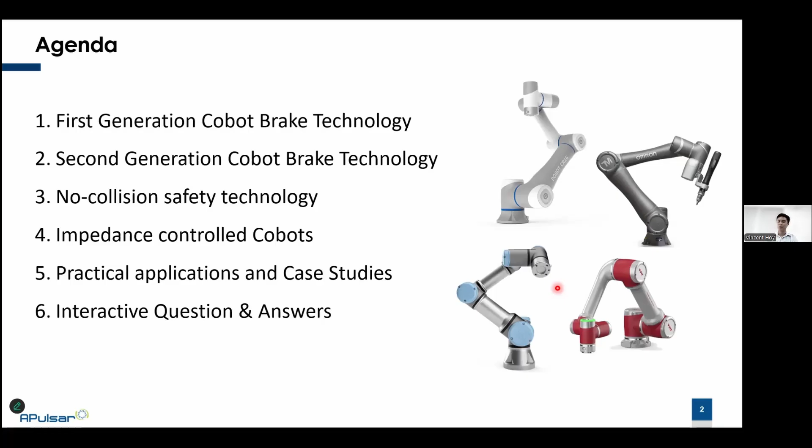And we're going to discuss the practical applications and the case studies and see in what circumstances the different generations of collaborative robots would be more suitable. And we will end the entire presentation with a Q&A session. So with that out of the way, I would like to first start with a general technological disclaimer.

Now, I'm going to first show you 4 photos over here. These are photos of the gearbox within industrial robots, and these are really established brands. You can see here there is KUKA, there is ABB, Fanuc, and Yaskawa. And you might be wondering why I bring up these photos. It's because I want you to notice how different the entire gearbox setup is within each of these well-known industrial robot brands.

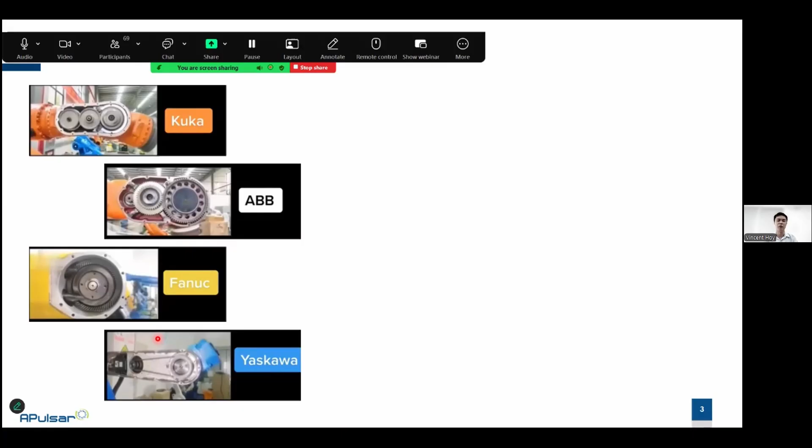Because throughout this presentation, I want everyone to keep in mind that different manufacturers have different internal mechanisms and designs to achieve the performance of the robots. And the same is true for collaborative robots. Unfortunately, we don't have really nice pictures of the gearbox of all the different collaborative robots, so I'm not able to show it in detail, but keep this in mind.

And the second thing is that the information that I'm about to share is actually very general, and it's a broad classification of the technologies in collaborative robots. So you may compare multiple brands and say that they have the same performance, the same repeatability, the same movement and joint angle, but there is a good chance that in the robot design itself, the mechanisms are totally different, right?

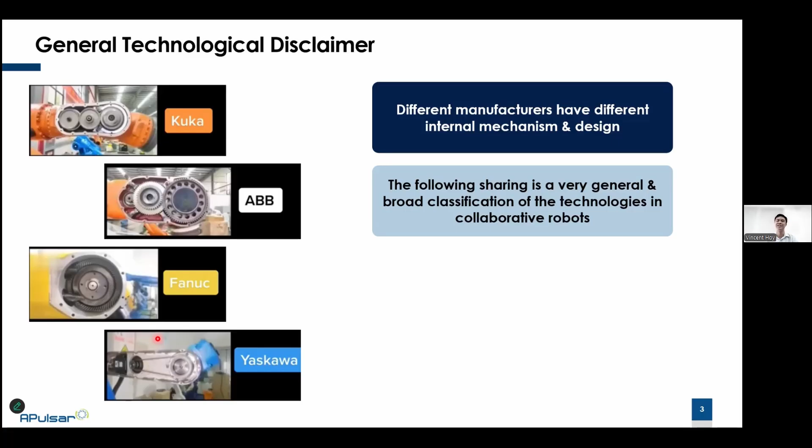So in this presentation, I will just try to group them in a very general manner so that we can use this information when we are designing our automation projects in the future. In fact, for most of us, if we look at the robots from the outside, we can't really see the difference, you know.

I'll give you an analogy. For those of you who know about Formula One, the racing car, right? You may look at the 20 cars on the track and they all look the same, you know, 4 wheels, a front wing, driver sitting in the center. But when you are familiar with the industry or with the technologies itself, you will begin to notice subtle differences between the cars. And the same thing is true with all the collaborative robots.

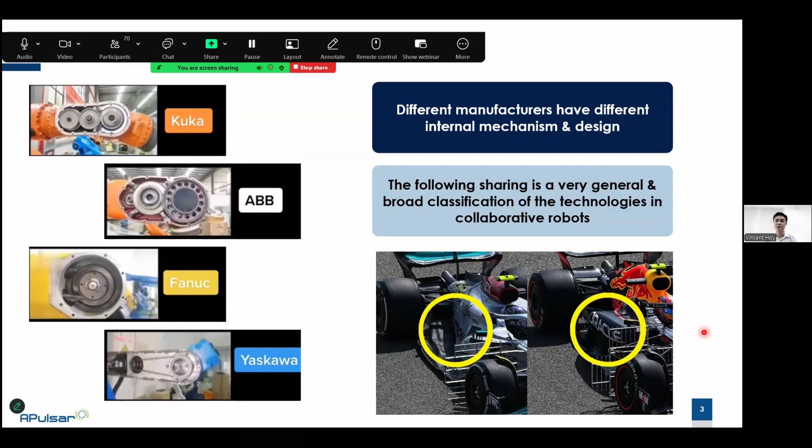Each of them may look the same, but there are actually subtle differences which differentiate the brands from each other. So with this disclaimer done, we shall now move on to a very quick refresher of the main differences, the advantages and disadvantages of collaborative robots in general.

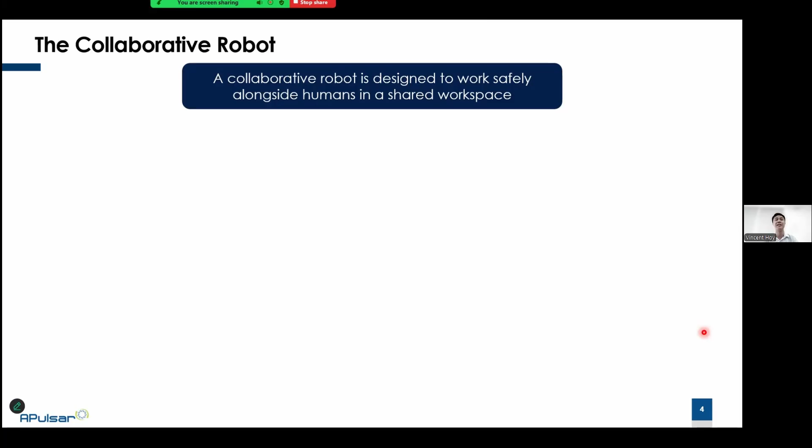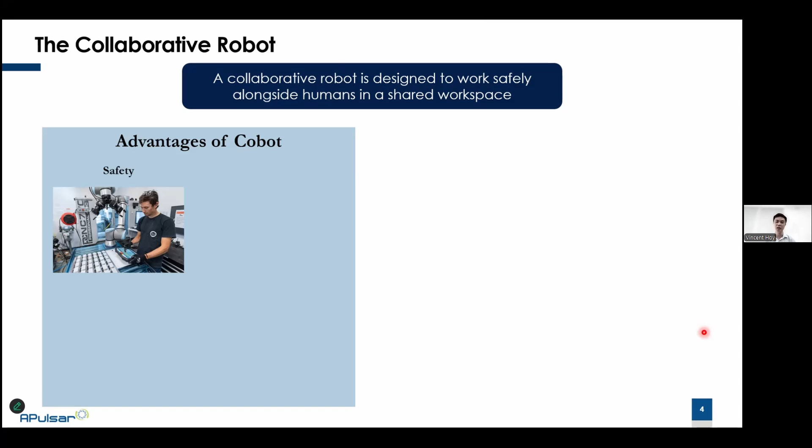So a collaborative robot is designed to work safely alongside humans in a shared workspace or a shared environment. That was the key differentiator that differentiates it from industrial robots. So generally, there are four advantages of collaborative robots. First is in terms of safety. Humans and the robot can work together without requiring safety fencing to isolate the machine from the operators.

Second, in terms of programming, collaborative robots tend to take a more user-friendly approach, a more graphical programming approach, a simpler programming interface as compared to industrial robots. Number three, collaborative robots are much easier to set up due to their light weight. The robot is lightweight, and the robot's controller is also significantly smaller.

So in the past, when we wanted to install an industrial robot, one person could not do it because you have to move these big robot controller cabinets around. But for collaborative robots, there is an opportunity where one person alone could set up the entire robot, from the controller to setting up the robot on the robot base and even the application itself.

And because of the lightweight design of the cobots, it makes them more flexible to mount. The same model of cobot can be table mounted, inverted mounted, or wall mounted. Whereas for industrial robots, if you want to do inverted mounting, you have to select a model that is designed for inverted mounting. So this kind of flexibility is one of the key advantages of collaborative robots.

Now, in terms of disadvantages, there are also four. First is in terms of the payload. Because cobots really prioritize safety to be able to work side by side with humans, they sacrifice a number of things, the speed and the payload. So if you notice, most cobots right now rarely go above 30 kilogram payload, whereas industrial robots can go up to 1 ton or even 2 tons of payload.

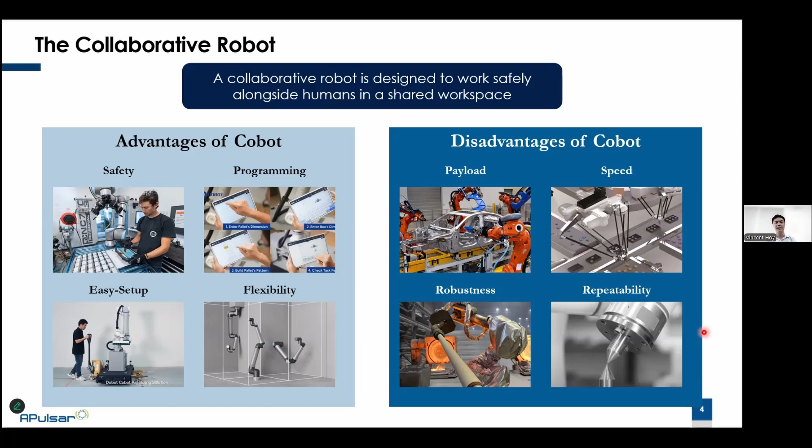So now let's talk about the first generation of cobots and what is interesting about it. This technology applies to the first collaborative robots launched in the market from the early 2010s, and it goes on all the way until the late 2010s or the early 2020s, right?

So what is interesting is that when they built and designed the first generation of collaborative robots, the main goal really was just to work alongside humans. They sacrificed the speed, the payload, and the accuracy so that they could work alongside humans, because that is the key product differentiator between cobots and industrial robots, right?

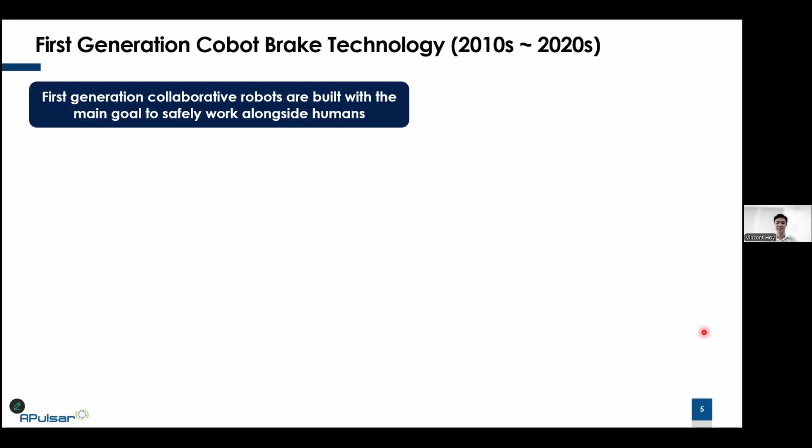So therefore, some of the key features that they emphasized are, number one, you can use this robot without safety fencing. And even without safety fencing, you are still compliant with the safety standards. Number three, they programmed the robot to be very user-friendly. It has a very user-friendly interface for operators and technicians to program and adjust the robots. And the last selling point is what we call hand drag point teaching.

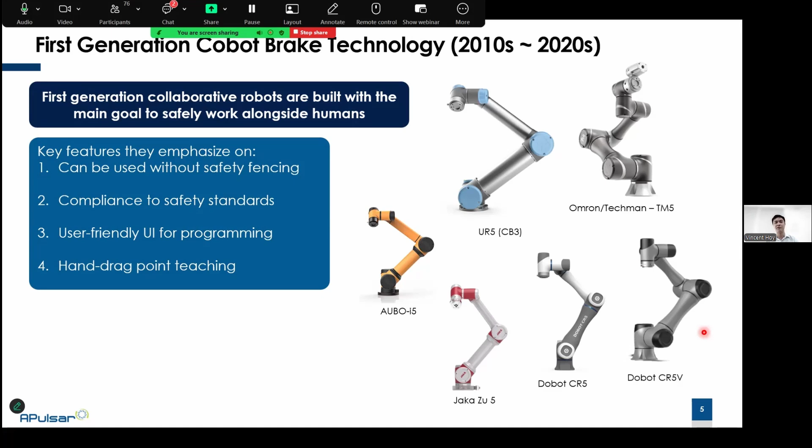So every time you see these presentations from many of these collaborative robot brands, they will always emphasize that you can use your hand to drag the robot around in order to teach the robot points. As you can see here, these are all the brands and their respective series, which are considered the first generation of collaborative robots. The pioneer of it all is, of course, Universal Robots with their UR5, specifically their CB3 series.

Every other brand listed here and their respective series are robots using the first generation of braking technology. The key point is that they use something called an impact pin brake design. I'm going to explain a little more what this is all about. Now, what is an impact pin brake? Let me show you this diagram.

An impact pin has what's called a strike pin over here and a latching fin on this side. All these slots here are the latching fins. Of course, there are many different types of designs, but the concept is the following. Number one, when the robot is powered off, this strike pin will be used to clamp on this fin component so that the robot does not drop down and collapse totally.

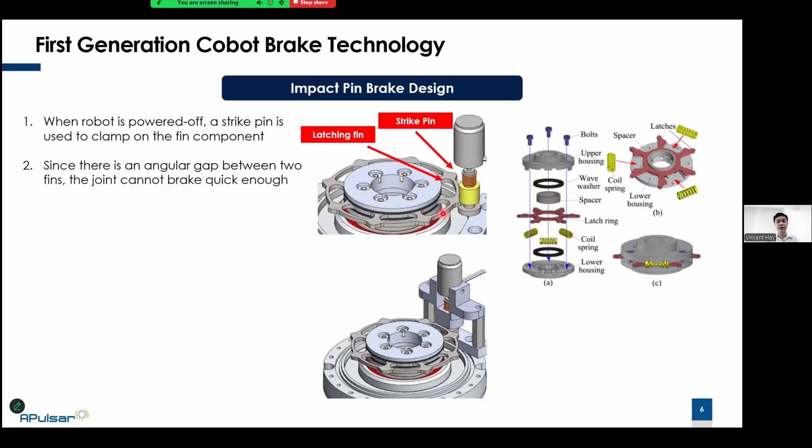But since there is a little bit of gap between these two areas, the pin cannot close the gap quick enough. So sometimes you will see that the robot drops a certain height, especially in collision status or in e-stop status. This height drop can be between about 5 to 10 mm. For some robot manufacturers the height drop is not really noticeable, some is more noticeable, but generally this is the range.

The key thing is that even though the robot has dropped in height, this does not affect the teaching point or the accuracy of the robot. And this only happens during the robot power on and off cycle, during the e-stop when somebody presses the e-stop button, when it detects a collision with an object, or when we are enabling or disabling the robot.

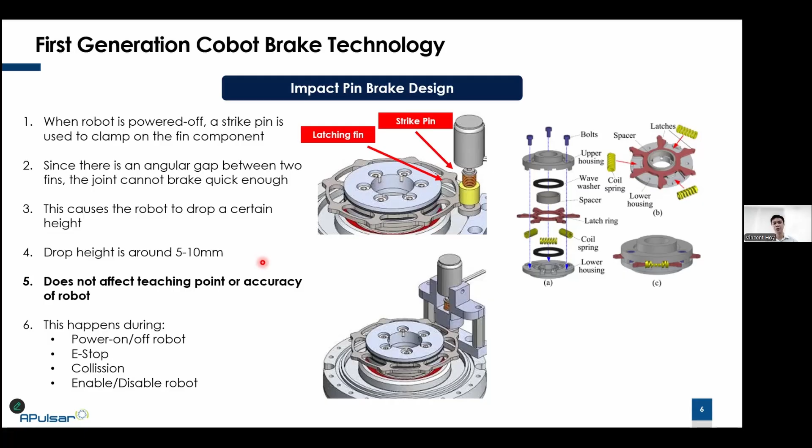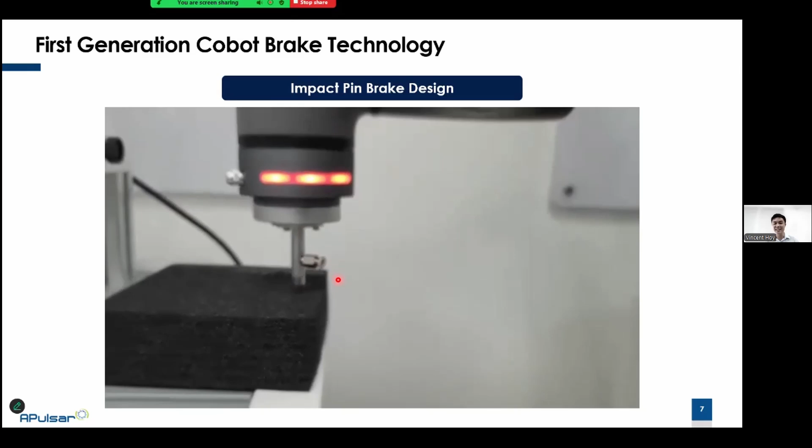For those of you who have been using collaborative robots for several years, you would notice this. In fact, let me show you a video of how it is. You can see right now this robot is programmed to move in a straight line, and it can move very accurately without any problem. But now as we press the e-stop, you can see the robot's pin actually sink into the plastic here.

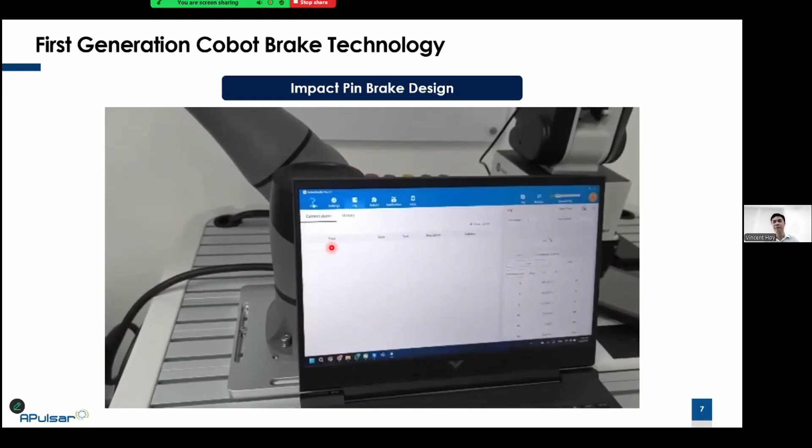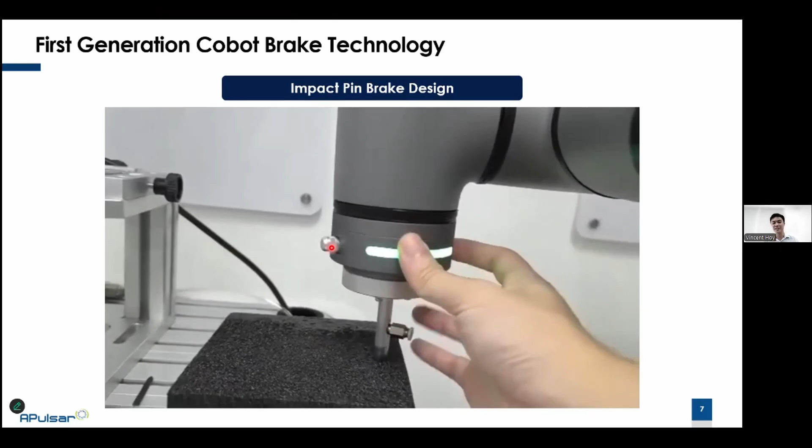This demonstrates it is using the strike pin technology, where if you press the e-stop, the robot will actually drop a little bit. Now in this video, we are going to reset the robot, move it into a safe position and replay the program. And you will notice that when we replay this program, the robot does not lose any accuracy. It still runs the same program with the same precision.

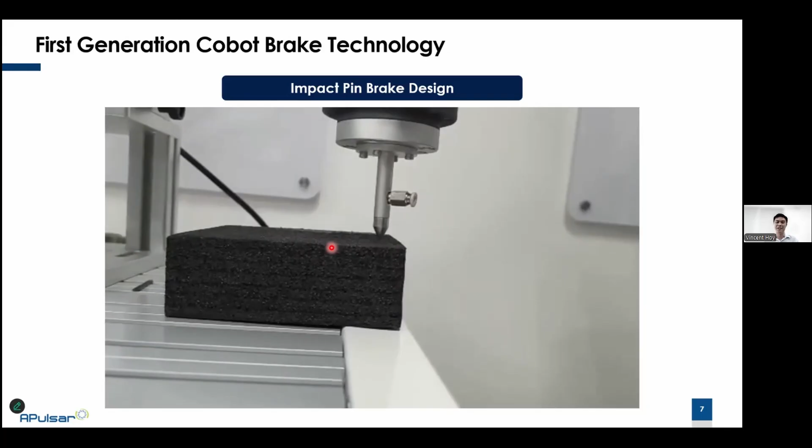It's only when we press the e-stop that the robot will fall about 5 to 10 mm. So this is the key defining technology of the first generation of collaborative robots. Now let us talk about the second generation. The second generation of cobots began to appear in the early 2020s. In fact, right now most of the branded collaborative robot suppliers are actively pushing newer series of cobots, and these are generally second generation cobots.

The goal of the second generation was to improve the performance and features of the first generation of cobots. They already got the basics right. Yes, the first gen cobots can work with humans. Now they want higher performance, higher speed, and even better features. So what do these second generation cobots emphasize? Faster joint speed on all joints, and a stronger motor with similar features.

They also have a greater range of motion on all joints. In first generation cobots, joints 4, 5, and 6 may have limited rotation, but in the second generation, they have greater joint rotation. Another point is that they now have even greater flexibility in the programming user interface. First generation cobots would usually offer either graphical or scripting, but in the second generation, we can do graphical and scripting.

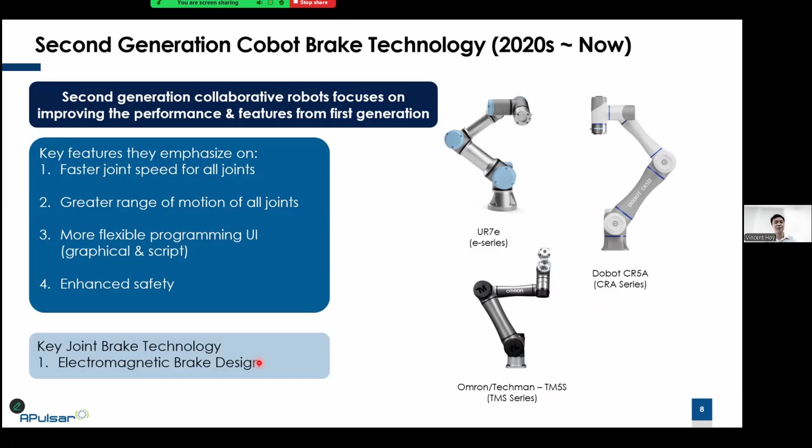And then for the TM or Omron, they have the TMS series. And for Dobot, they are the CRA series. So all these three, they are more of the second generation with the newer features. And the key defining technological differentiator is that they now change the brake design. Instead of an impact pin, they now use an electromagnetic brake design. So now we will explain a little bit more about this electromagnetic brake design, what makes it so different.

Now, this diagram is a very general concept of the electromagnetic brake. You have the motor rotors, you have the joint components, the mounting base, and the braking armature here to hold the robots together. So when the robot is powered off, the brake body and the braking armature will engage within less than 20 milliseconds. So now it becomes very, very fast response.

In first generation, they wait for the impact pin to drop. So it's a mechanical trigger, but now it becomes an electrical trigger to stop the robot. And because of the fast response time, the robot drop height now becomes less than 1 millimeter. Actually, it's barely noticeable, right? And because of this, when the robot brake is engaged, it does not affect the teaching point or the accuracy of the robot.

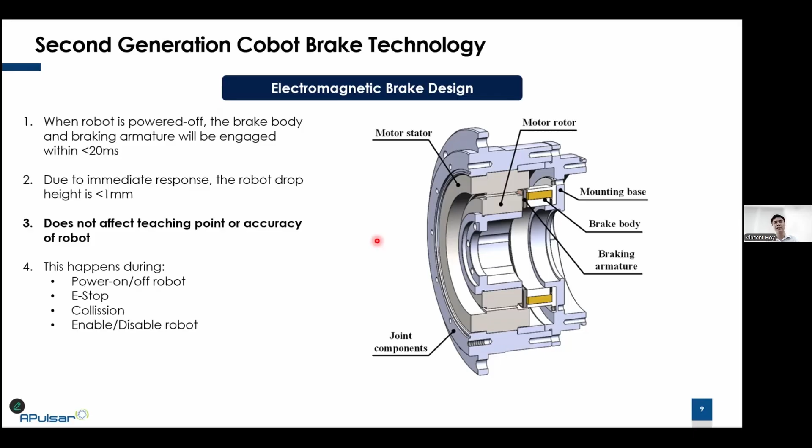And the same situation occurs during the robot power on and off. It will also occur during e-stop, collision, and also when we enable or disable the robot. So in summary, the second generation uses the newer technology, this electromagnetic brake, and you no longer see the behavior where when you press e-stop, the robot will drop down. In fact, we can show you this video.

So now you can see the robot is moving in a straight line. And now when we press the e-stop, you will not notice the robot drop. Whereas in the first generation of cobot, when we press the e-stop, the robot will drop ever so slightly, about 5 to 10 mm. It may touch the box in this scenario.

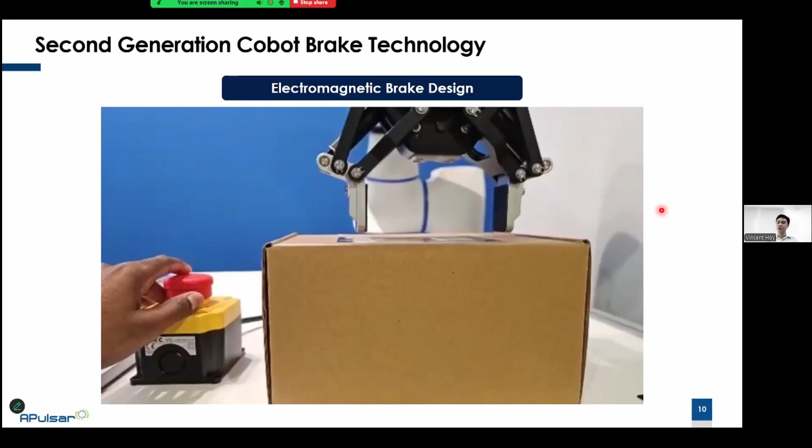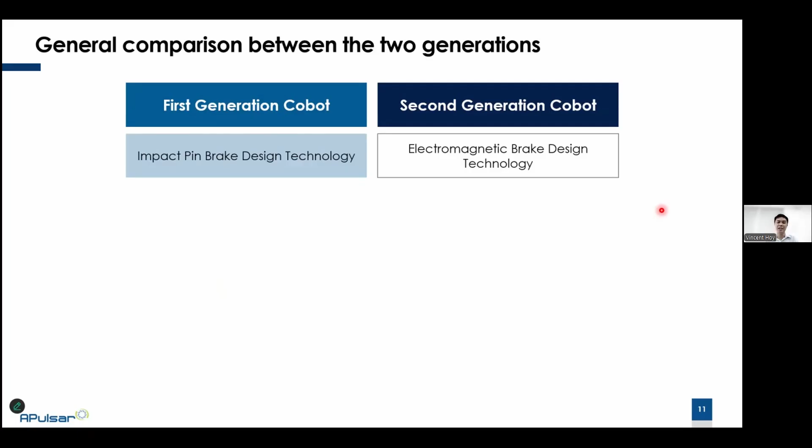Okay, so now let's do a very quick summary of the comparison between first gen and second gen collaborative robots. The key differentiator being, first gen use the impact pin brake design. Second gen use the electromagnetic brake design. Next, first generation tend to have a slower joint speed and a limited joint motion range. Second generation improve upon it. They have the faster joint speed, and a greater joint range for some of the axes of the robots.

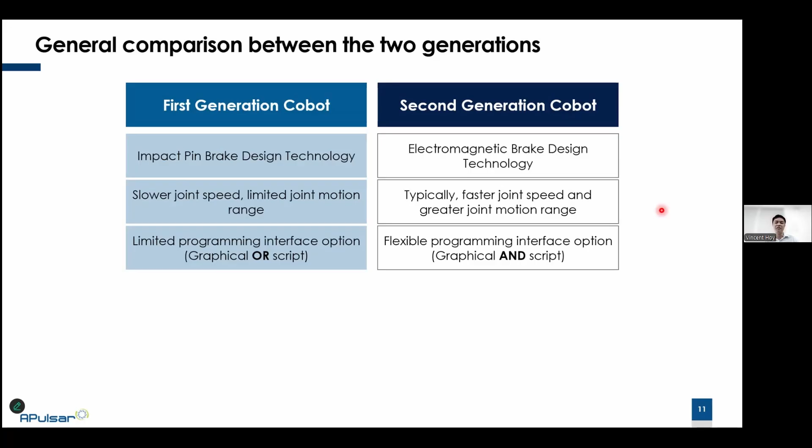Next, first generation cobots have a limited programming interface. Usually it's graphical or script. My understanding is that Universal Robots are script, and TM Omron used to be purely graphical. But the second generation cobot tends to be more flexible. Right now, people begin to offer both graphical and script. So it gives more flexibility for the programmer.

Next, for first generation cobots, the payload tends to be less than 20 kilograms. Because at that time when they were designing this robot, they were just trying to make sure that the robot can work safely with humans. And usually the greater the payload, the greater the risk to the operators, especially when a collision has occurred. But for second generation, they improved their safety algorithms and the motor technology they use. So the payload has increased, and now I think it can go up to 30 kilograms.

And finally, in terms of cost, today in 2026, first generation cobots tend to be a little bit cheaper because they are using a slightly older technology. Whereas second generation collaborative robots tend to be slightly higher cost because they are using newer, more advanced technologies, right? So this is a very general, very broad comparison between the two generations.

And now we shall move on to the next topic, which is no-collision cobot safety technology. Now, first things first, we can all agree that as manufacturers, safety is the top priority in the manufacturing line. In fact, that is the whole selling point of collaborative robots. It's safer to be used in the manufacturing line. It's more user-friendly for the operators. However, for almost all collaborative robots, the robot must hit something first before it can detect a collision.

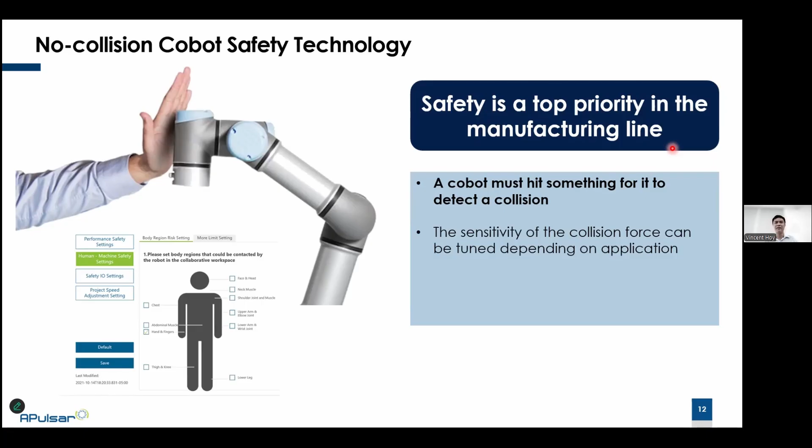Even if it's safe, it still has to hit something, whether it's an object or a human or an operator in the operations. Only then it will stop, right? Some operators, or some of the robot brands, said, oh, we can tune the sensitivity of this collision to the point where even a simple touch with your hand would be enough to trigger the robot to stop. That is true, but the fact remains, it still needs to touch something, only then it can stop.

And this still creates a risk sometimes for humans, where you might get some minor injuries, especially when it is the robot gripper that hits the operator, or when it hits the operator and the load that it is carrying drops, or the load itself contains sharp edges.

One of my customers, especially the safety officer, used to tell me that all robots are dangerous and must be put into safety fencing, no matter if it is a cobot or industrial robot. And I asked him why. He says, very simple. Imagine you put a knife at the end of the robot as an end effector, and even if it's a collaborative robot, if the knife stabs into somebody, then it stops. But the fact is it still stabbed into somebody. So that's why it failed in terms of the safety compliance. And when he gave this kind of example, I think, yeah, quite interesting.

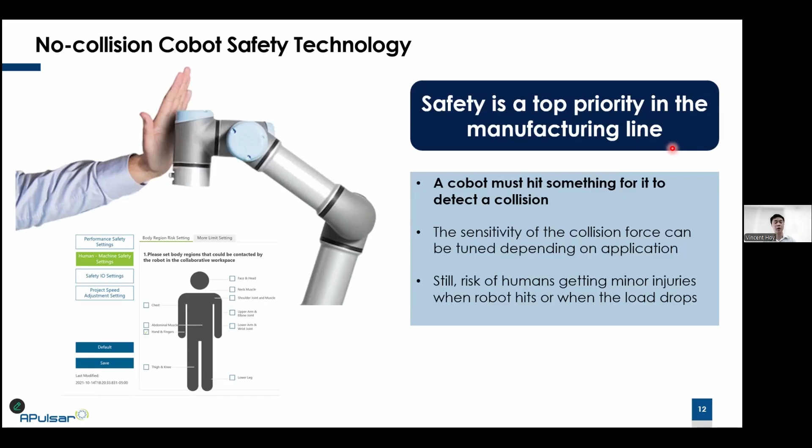Now, the advantages of this system, there are a few. Number one, we can customize the safety zone. Normally safety scanners always come in a circular area. But for some safety scanners, you can define it to be a square or a rectangle, or you can even define multiple safety areas and safety zones. So it's very customizable. Second, it totally eliminates safety fencing, even for industrial robots. So you can definitely save some space and some cost, and it makes it easier for your technicians to perform maintenance.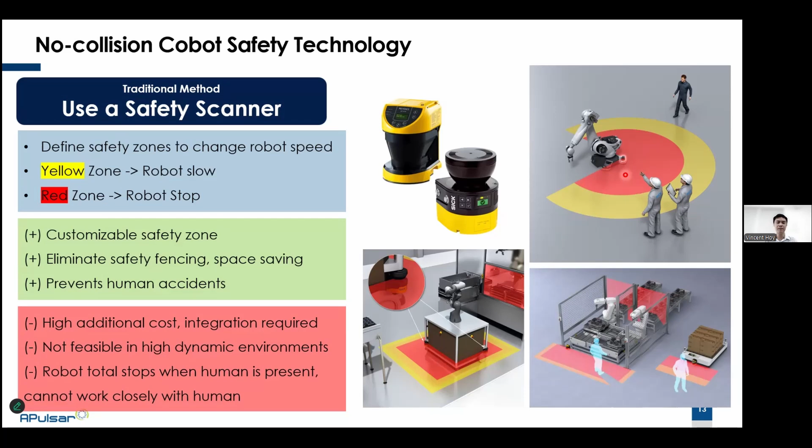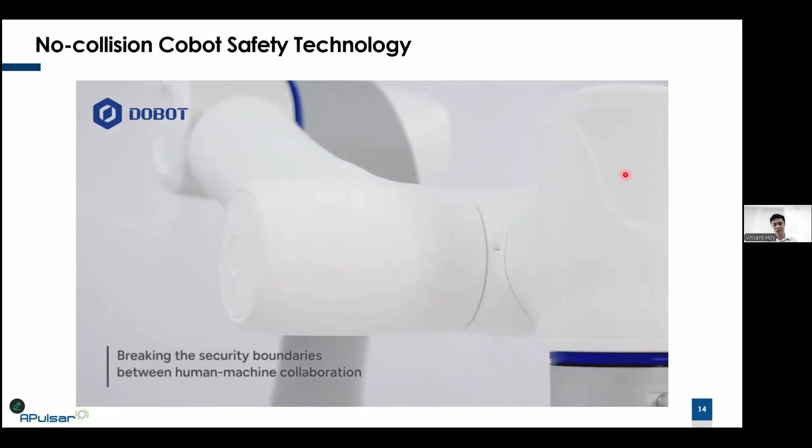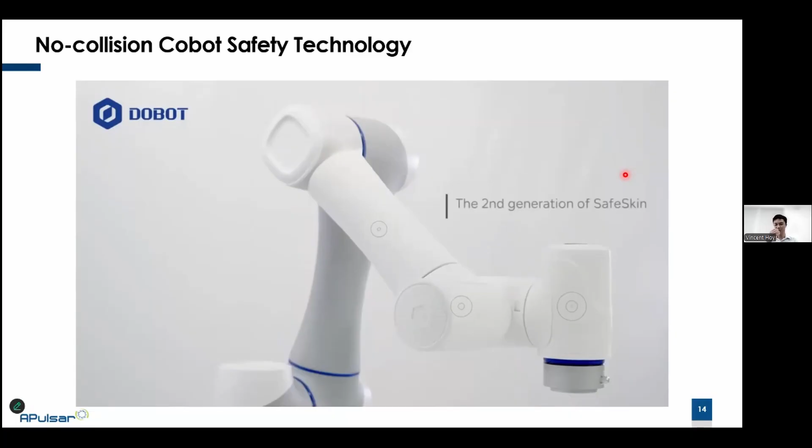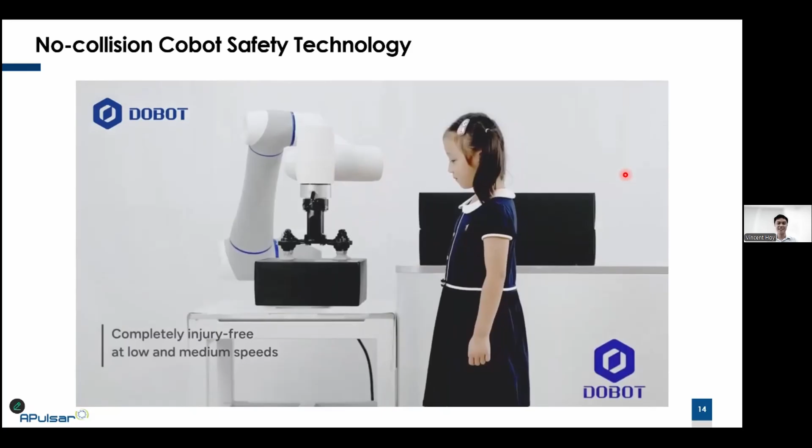So the second method, this is a newer technology. The second method for us to do this, I'll show you this video. This is SafeSkin technology. It's pioneered by Dobot brand. And as you can see here, the cobot is able to detect a human without touching it, right? They put some special sensor on it, and even before touching, the cobot will be able to detect and stop. So this is something interesting, another way for the robot to stop itself before it touches or any accidents occur, right?

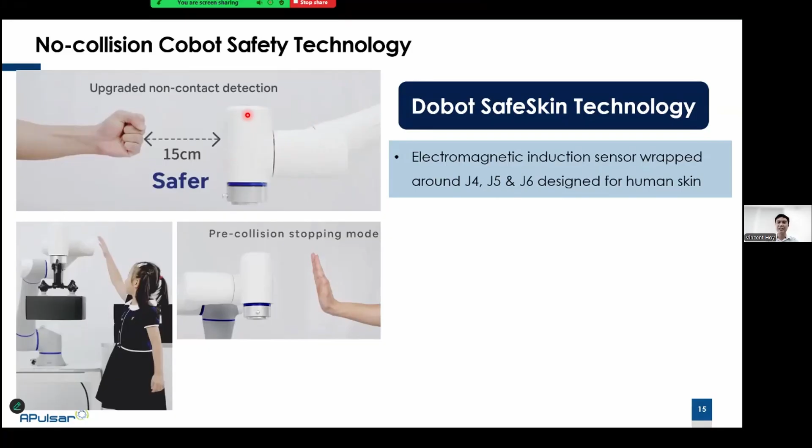So now let's talk more about this. This is a SafeSkin technology, pioneered by Dobot. So what are the key features? First thing, it uses an electromagnetic induction sensor that is wrapped around joint 4, 5, and 6, designed for human skin. So here is joint 6, here is joint 4 or 5, and here is joint 4. So as you watch in the video, joints 4, 5, and 6, instead of the hard metal exterior, are actually made of this soft silicone cover that not only detects, but also serves as padding if it indeed hits something.

Now, the advantages of using this kind of technology is that, number one, it enables the robot to work very closely with humans. Like you can see in this picture, the little girl can literally walk next to the robot. And if she is nowhere close to the end effector, joints 4, 5, and 6, the robot will keep doing its job without any disturbances.

Second thing is that this kind of technology is quite resistant to external environment interference. So imagine if you use the previous solution, the safety scanner. Imagine if there is a change in the external environment, suddenly the light changes, they put different objects in different locations, that would disrupt the operations of the machine. But for this technology, because the detection is only at the end effector near joints 4, 5, and 6, the chances of the external environment interfering with it are much, much less.

And next, it has a very fast response speed, 10 milliseconds, and the robot would be able to stop. And we can tune the sensing range up to 15 centimeters. Meaning you can tune it to be 5 centimeters all the way to 15 centimeters.

And the best thing is that this technology is built into the robot. I cannot buy this as an additional accessory once my robot is there. So this thing is built into the robot in the factory and shipped together. And this also means that the software is fully integrated. I just have to enable and disable this function. So I don't have to go through all the hassle of programming it, testing it, integrating it all together.

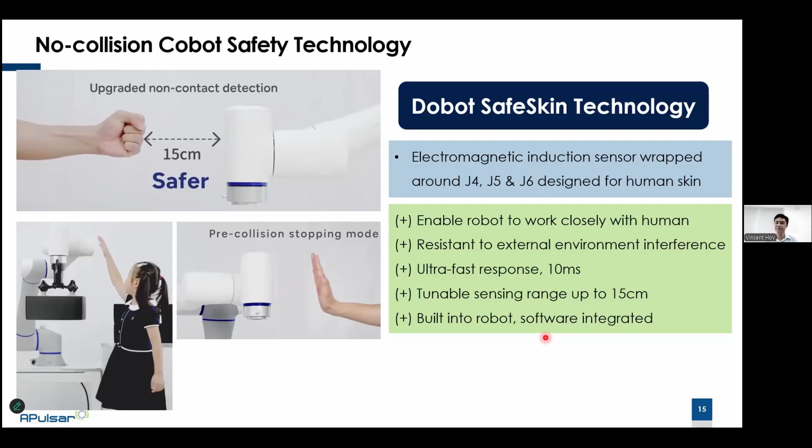Now, the disadvantages of this thing. One, it has limited coverage. It's only installed in joints 4, 5, and 6, right? So some may say, oh, joints 1, 2, and 3, how? Will it still hit somebody? The answer is yes, it will still hit somebody with joints 1, 2, and 3 if they're not careful.

And next, it may limit the robot motion in tight spaces. So as you can see in the video just now, if there is an object too close to the robot, the sensor itself may detect the object and it may trigger itself to stop. So imagine if you are in a very tight space environment, then this type of safe skin technology is not very suitable. Okay, so these are the no collision cobot safety technologies.

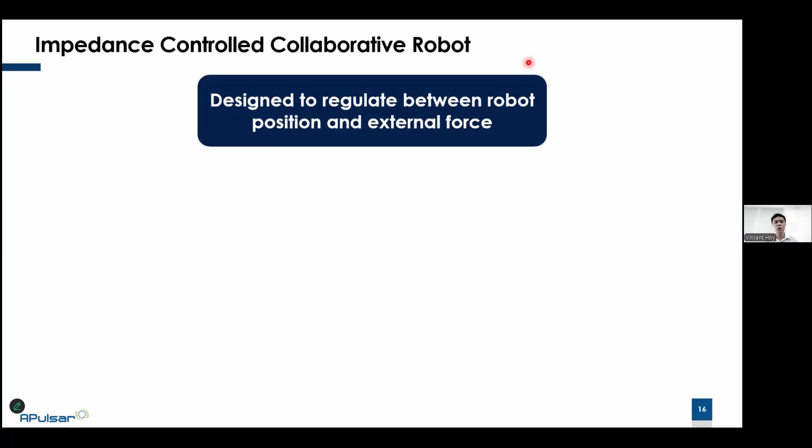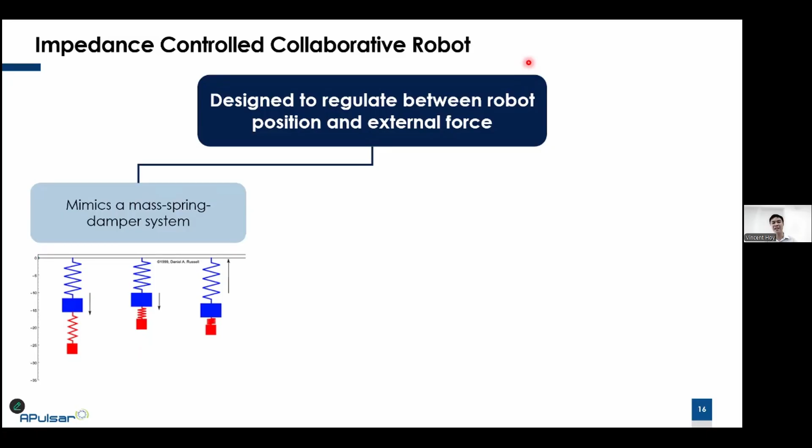Okay. So what makes this robot special? The key concept is that this robot is designed to regulate between the robot's position and the external force being applied to the robot. Now, three things. One, this robot mimics a mass spring damper system. Later, I will show you a video and you will be able to see exactly the behavior of this robot. This robot uses a lot more force torque sensors and torque controlled actuators to control the motion of the robot. And thirdly, this robot actually yields to external force but maintains the end position.

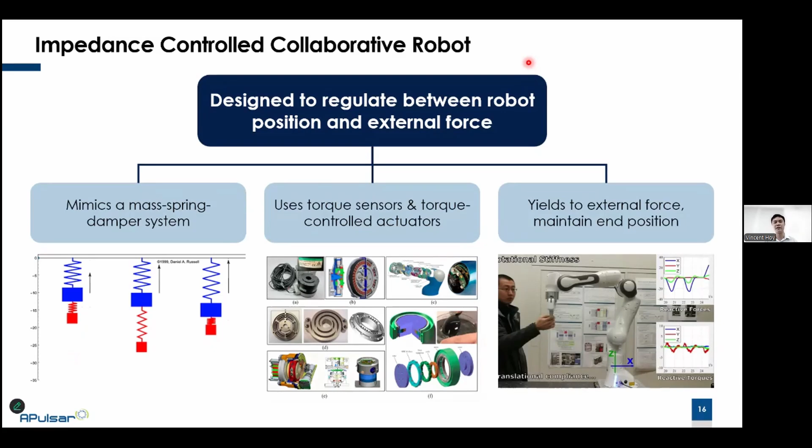Means that you can actually push the robot around like it's like jelly, so then you can do some pretty interesting applications. Now I show you this video so you can see this robot, human hand, you can push the robot, it can move like a jelly, you can move it around, right? And the key thing is that after you release the external force, the robot will always try to maintain the position that you have taught the robot. So it will always try to maintain that position.

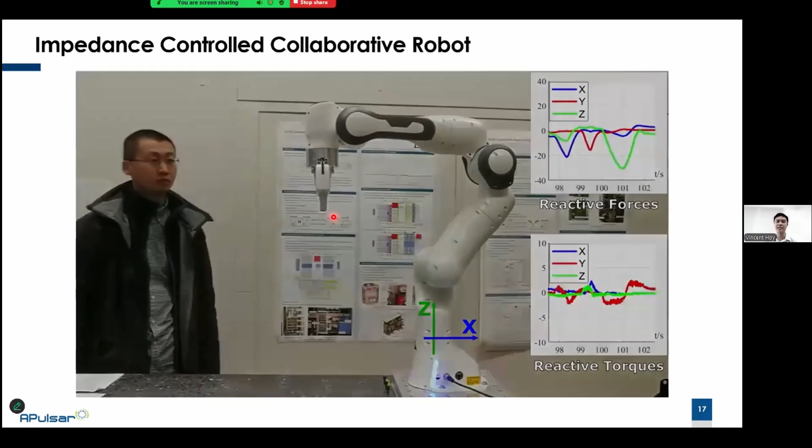So let's say you see now, he will push the robot away. Then once he releases the force, the robot will bounce back to the point that you have taught it. In fact, you can even twist the robot's other joints around, and as long as it can maintain the final position, the robot will be able to adapt to this environment. So you can see now he pushed the other joints, he pushed it to the other extreme end, and the robot will still maintain the position here, right? So they call this positional compliance, whereby no matter how much external force you exert on it, the robot will always try to come back to the position.

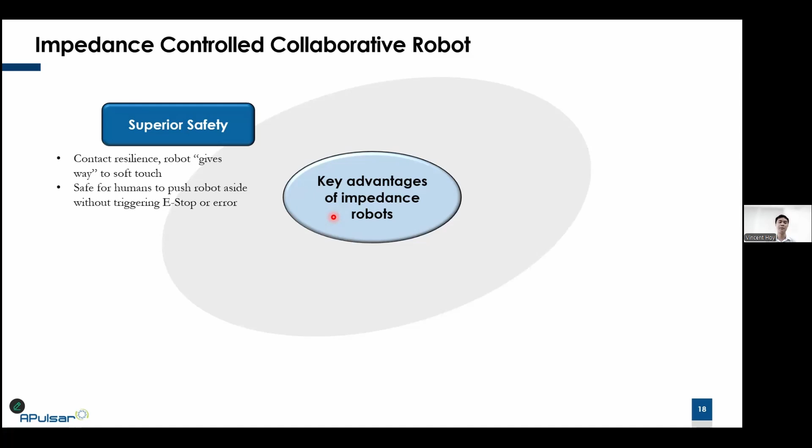Now, what are the key advantages of these types of impedance robots? There are four. First, their safety is much more superior compared to our standard collaborative robots. Why? Because when it detects a force, let's say it hits something accidentally, rather than triggering e-stop, the robot actually bends around, it gives way to the touch. So it can actually bend around the obstacle, right? So when we are operating together with a human, and if let's say the robot is moving to where the human is, the human can actually push the robot aside and continue to do their job, and the robot will not lose its position, and it will also not trigger an emergency stop or an error for the robot. So in this case, it's very superior in terms of safety.

I will give you an example. If I'm using a Cobot, and if the Cobot hits my hand, right, I can set the sensitivity such that I don't get hurt, okay? I don't get hurt. But my Cobot will stop. It will trigger emergency stop, collision detected. And then I have to go and reset the robot. But with this kind of impedance controlled robot, right? When the robot hits me, the robot will just wait and it will bend a bit. I mean, it will wait, soft touch until my hand is removed. Then it will continue to move to the position that we program it to be. So in that case, it's much more superior in terms of safety.

Second, it can do adaptive tasks much better. Because this robot can feel its way, it can feel the object as we teach it. So it makes it much easier to adapt to irregular objects or irregular positions. And next, it can easily compensate for misalignment. So in the past, every time we want to do insertion, like imagine a hole and you want to insert something in the hole, for this type of application, we always say to the manufacturers, you must pair it together with a vision inspection system or a sensor, because we want to measure whether there's any misalignment, and then we would program the robot position to compensate for the misalignment.

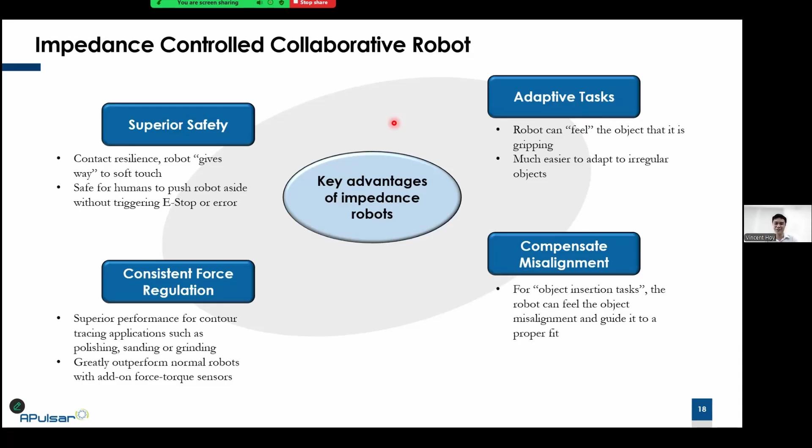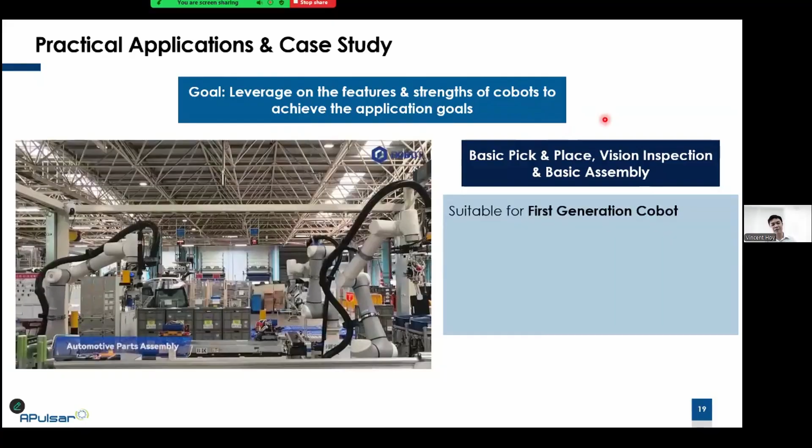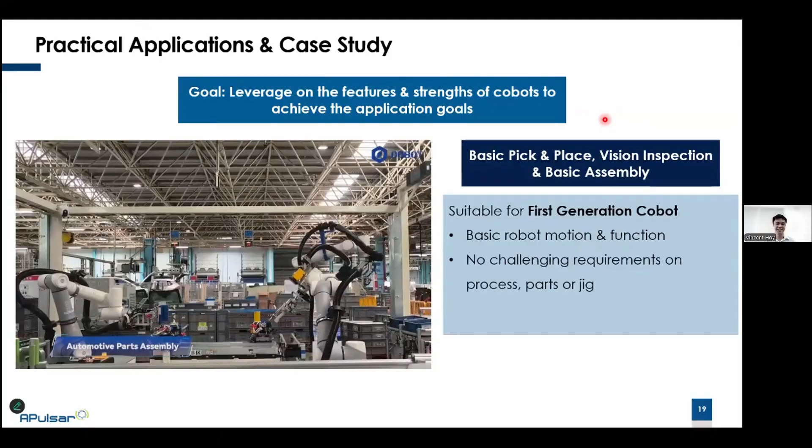Why? Because you only need the basic robot motion and function. You don't need some fancy applications. You don't need some fancy solutions. Provided that there are no challenging requirements on the process or the parts or the jigs, then you can use this first gen. Why? Because your priority is you want to have the lowest cost possible to achieve your ROI. Remember, I shared that the first generation cobots today tend to be a bit lower cost because they are using the older technology.

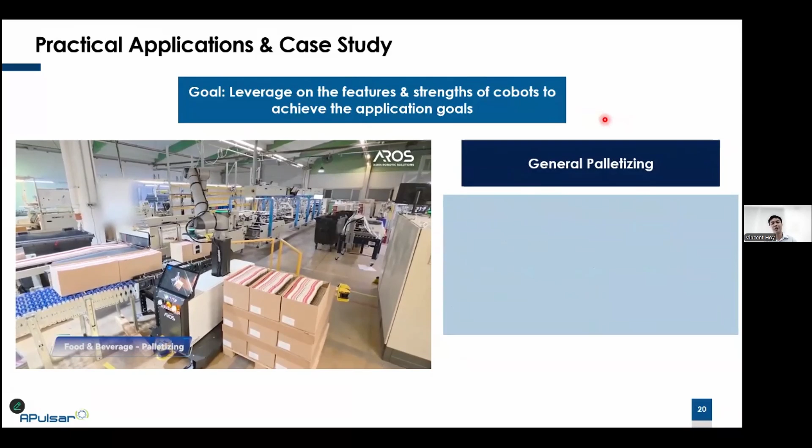Okay. So another example application would be palletizing in general. Now, for palletizing, most of the solutions you see out there that give the full palletizing solution together with the robot and the pallets usually tend to be first generation collaborative robots. Why? Because palletizing is a very price competitive application. You can now find so many suppliers from so many different brands. Everyone can give extremely good pricing. And it's all because they are using the first gen, the older technology of cobots,

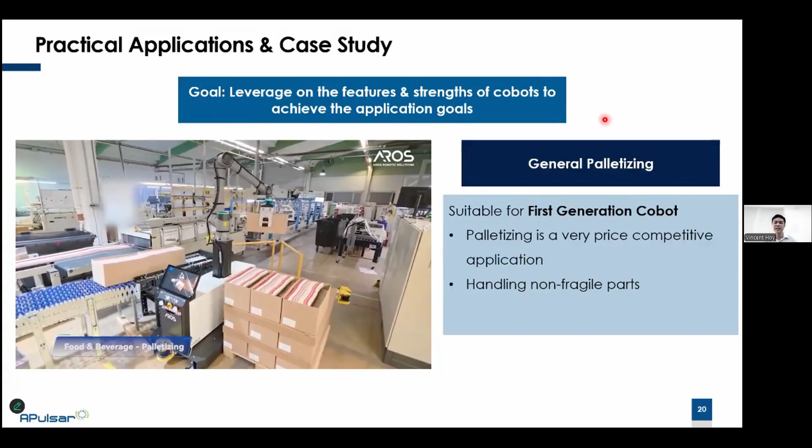and it's good enough to solve the problems. And this is especially if you are handling non-fragile parts. You don't even care. You just want the robot to pick and place nicely, and it does the job, and that's it. The key here is that you always want to balance the system speed and the system cost to achieve your ROI. Some people may say that palletizing is not suitable for cobots at all. You might as well use industrial robots because they are much faster and can carry a much higher payload. And that is true to a certain extent.

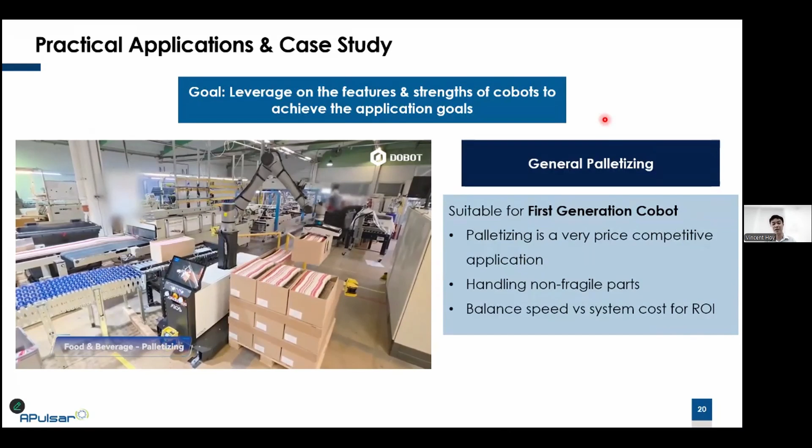It really depends on how big the box is that you're handling and how fast the output from your conveyor line is. If you have very high throughput from your conveyor line, a cobot is definitely not fast enough to cater for your application. But if your throughput is not very high and you want something cheap to start with, without safety fencing, without all these complex interlocking systems, then collaborative robot palletizing is the perfect solution.

Next one. Now, this is quite an interesting application where you are using the robot to paint a building. This is an example video from China, because they build high rises really fast. And in order to save on labor cost and labor time, they actually use robots on an AMR system to move around the building to very quickly spray paint all these walls. So for this application, hands down, first gen is the answer.

Why? Accuracy and repeatability are not critical since your paint will be overlapping anyway, and there are some portions at the bottom here that you have to manually paint. So it's not really mission critical. So first gen, good enough. And it is very unlikely for you to damage the spraying head in an e-stop scenario.

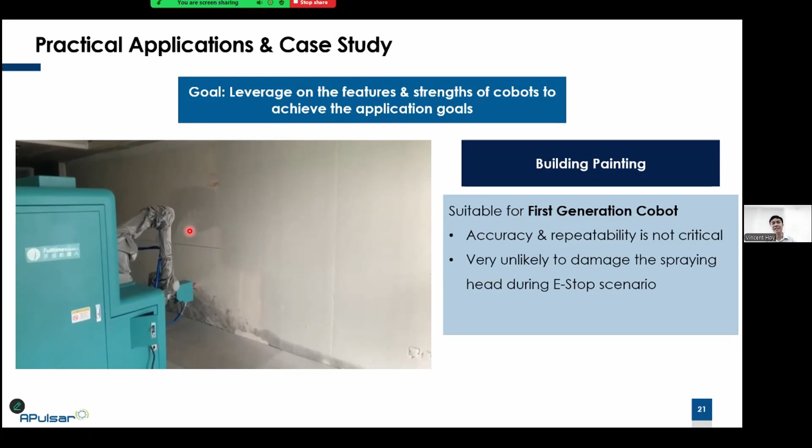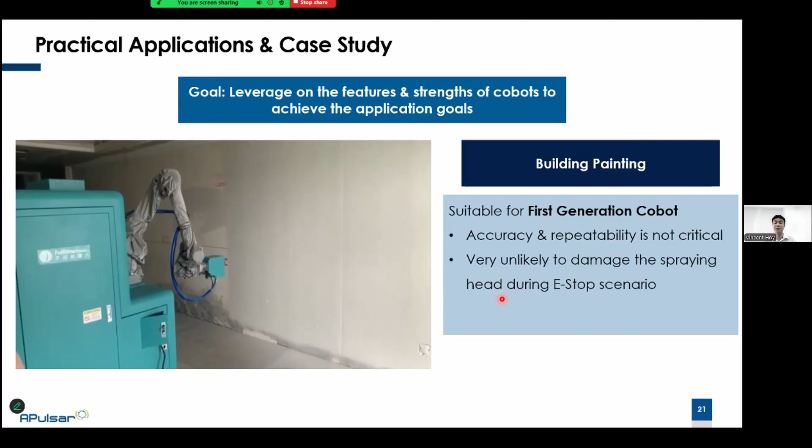You recall in the beginning, I mentioned that if you press the e-stop, the robot will drop a little bit. In this scenario, there is so much space on the floor. Even if you press the e-stop and the robot drops a little, there's no chance of damaging your spraying head. So you want to optimize for the lowest cost possible, and that's where the first generation robot is the most suitable one. Now, let's talk about this application: medical and chemical lab automation.

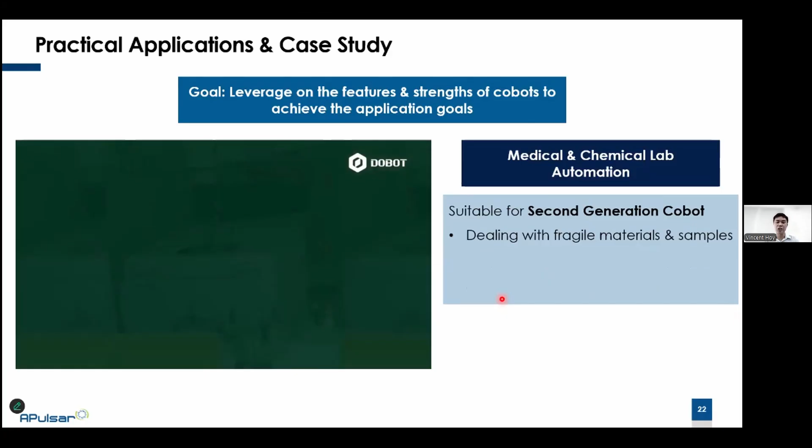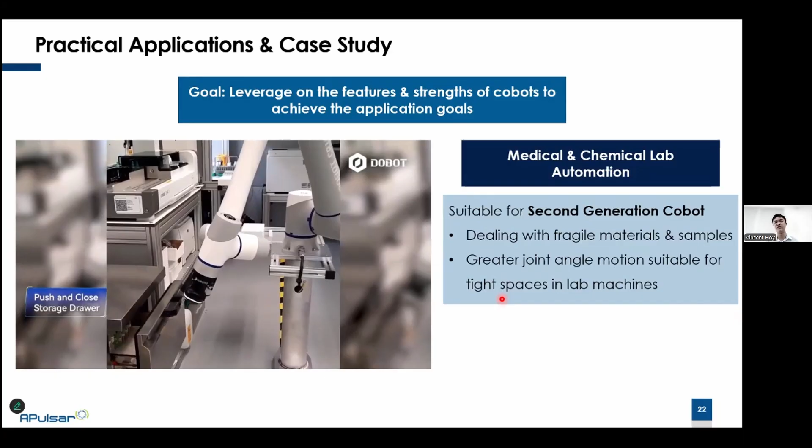For this type of application, I would highly recommend that you consider a second generation Cobot and above. Why? Because you are dealing with fragile materials and very fragile samples. And because of this type of machines, lab equipment, the space constraint is very critical. So you want to make sure that your robot has the most flexibility in terms of the joint motions and the angles.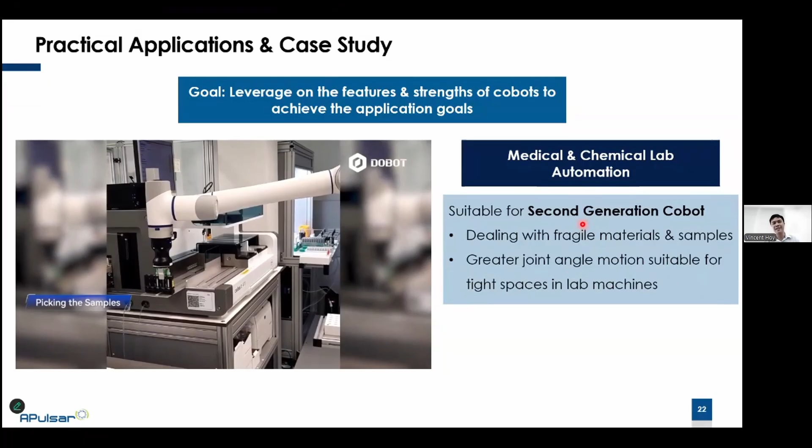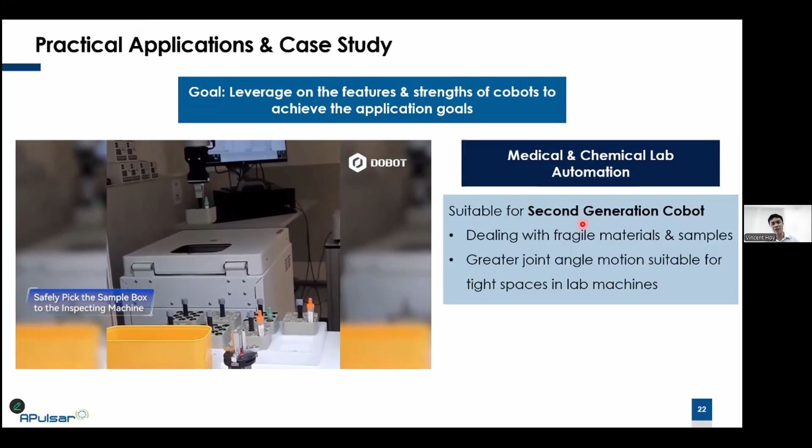Now, why do I say that when dealing with fragile materials, it's better to use a second generation Cobot? Imagine the robot is picking up a test tube from a tray, right? It's picking up, and before it has fully left the tray, somebody presses an e-stop or something triggers the e-stop. If I use the first generation Cobot, the Cobot will drop, and that may actually break the test tube or the medical samples, and that's something we want to avoid, because in a medical environment we want to make sure that all the samples are well processed. So that is why second generation is more suitable.

Another example would be welding. For welding, our second generation Cobot will be most suitable because the welding gun will not be damaged when you press the robot e-stop during the welding process. Imagine during the welding process, the welding gun is very near to the metal piece, the workpiece that you're working with. And if, let's say, it's welding halfway and suddenly you trigger the e-stop, the whole welding gun will drop about 5 to 10 millimeters.

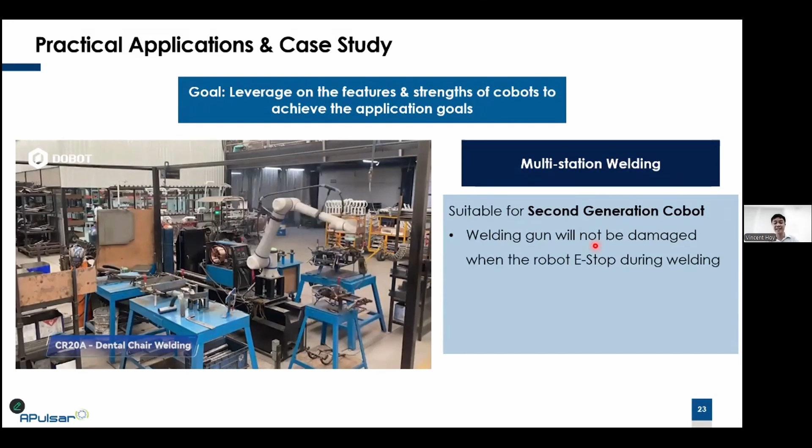And sometimes that would be the distance between the workpiece and the welding gun itself. So that may actually cause the welding gun to touch or bang the workpiece, and that may cause your welding gun to be misaligned. So this is one of the issues.

The second thing is that for production environments with high mix production, where you always have to change to new models, right? Collaborative robots are much easier to teach the welding patterns for new products. But of course, compared with an industrial robot, it cannot beat the industrial robot in terms of speed. So for high volume production, I would think that an industrial robot is the better solution. But for manufacturing that has high mix, collaborative robots may be more suitable.

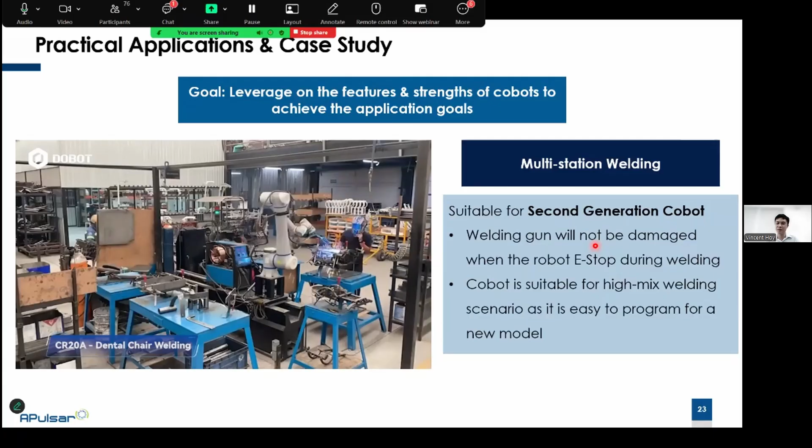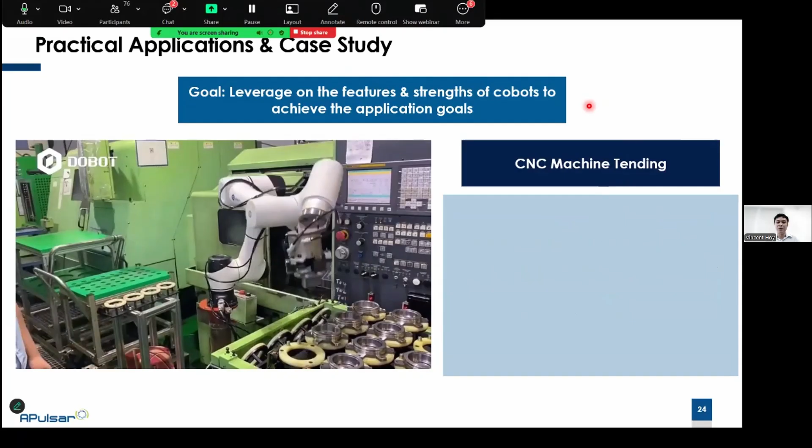Right, next, CNC machine tending. You can see this video is a good example of how you can use SafeSkin technology to collaborate with the humans and the machine itself. In this video, we can use second generation because we do not want the Cobot to drop when it is loading and unloading the materials into the CNC machine.

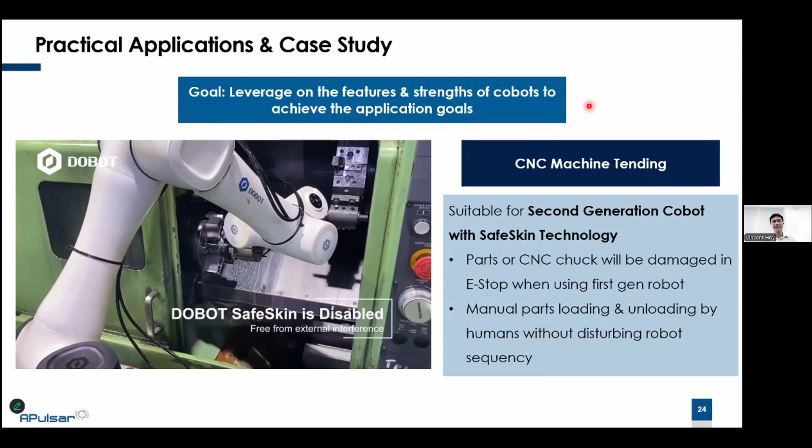At the same time, if your process requires manual parts loading or manual parts handling by an operator, then by using the SafeSkin technology, the operator can be very confident that they can put their hand in to move some parts even though the robot is very close by, because the SafeSkin can detect their presence and stop so that they can do their post-processing. Only then does the robot continue its process.

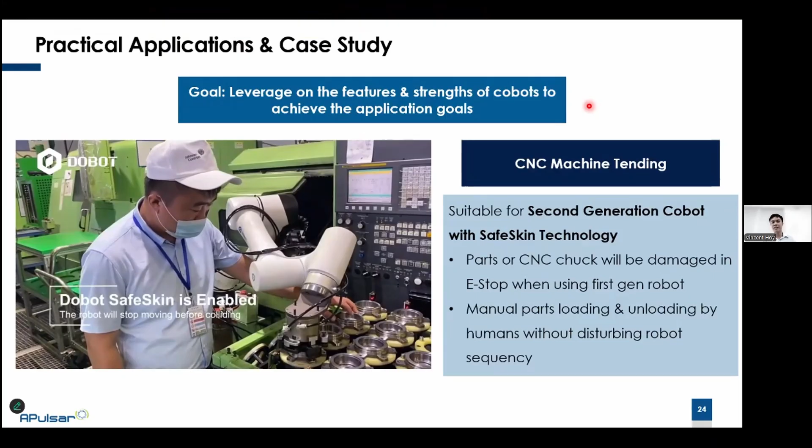The key advantage of using this is that, as you notice, even after the operator removes his hand, the robot continues the program sequence. So I don't have to restart, reinitiate, or press the start button for the robot to continue. It can just continue the program without any interruptions.

Now, let's move to this application. This is very interesting: advanced parts insertion. This is something that the impedance Cobot is really, really good at, especially if your incoming parts are not consistent. If you see in this video, you notice the parts here and the position of the robot are not aligned. If I were to force it, it would create a collision. But because this type of robot can feel the hole, it can actually adjust up and down a little bit without us needing to program this feature.

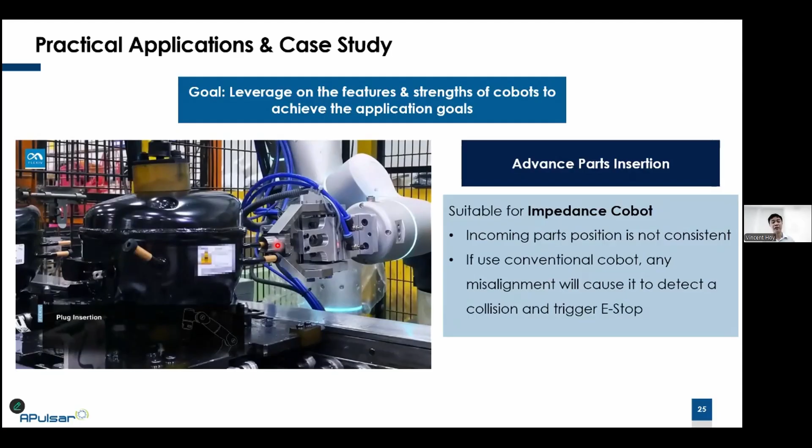So it can very safely and easily slot in these kinds of applications. A lot of the time when I meet customers and propose applications, I always tell them, if you want to use robots, you must give me consistent incoming parts. Only then can I consistently assemble for you. But oftentimes creating that consistency is very difficult. Like in this scenario, the parts are just moving on an open conveyor. You can even see the parts shaking as the conveyor stops, and the position may not even be very fixed.

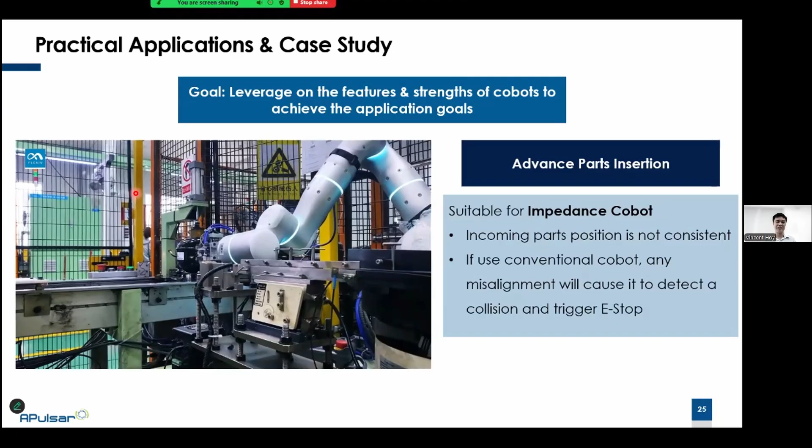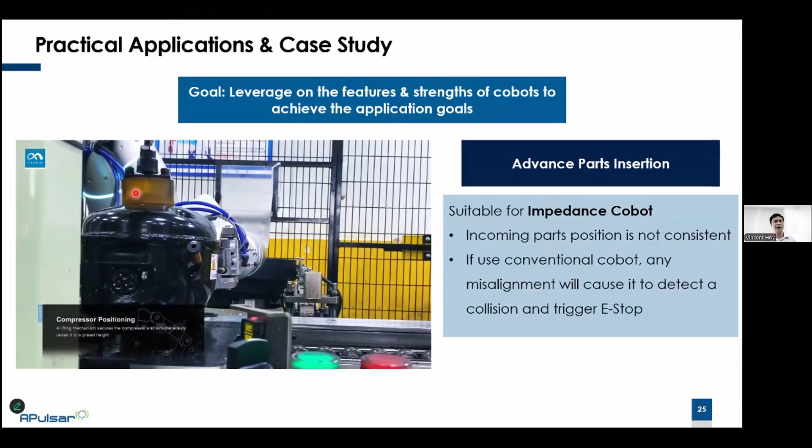So this is where the impedance cobot is really, really thriving in this kind of environment. I cannot do this with normal collaborative robots unless I put a vision system just to check whether there's any misalignment or not. So that is an additional cost for me.

Now, another application we can talk about is glue application, right? So sometimes when we want to do gluing for simple applications whereby I just have to glue a straight line, glue in a rectangular or following the frame shape, that can be done by any robot. But if, let's say, in an example where I need to apply the glue around this tip, you see, around this circular area, wow, this is very, very challenging, especially if this object here has a bit of free play, means that it can jiggle around.

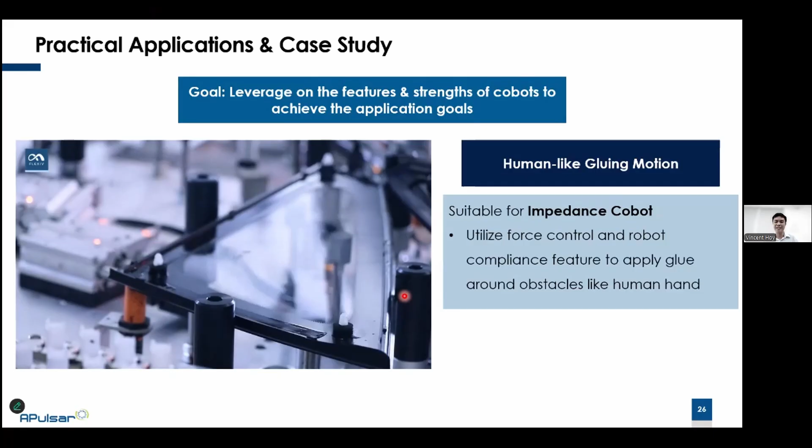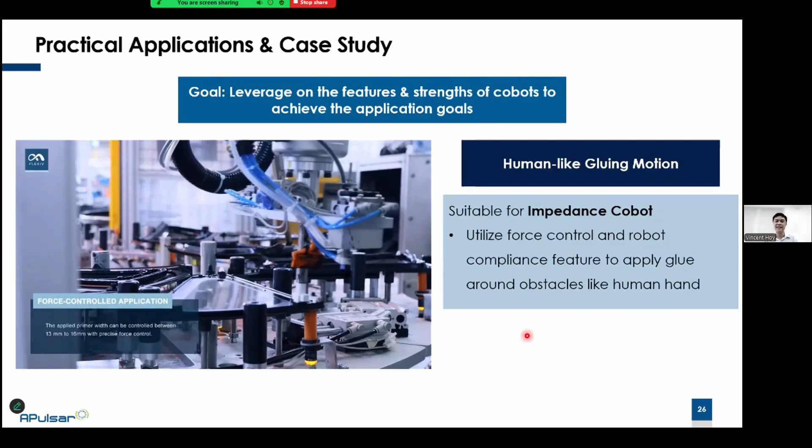So how to mimic a human operator? They can take the brush, right, and then they can brush around this tip very nicely. This is where the impedance cobot can utilize its force control and its ability to feel the object to brush around it. So this is something very unique and very interesting; a lot of the times many of the robots are unable to do it well, and this is something that the impedance cobot can do. And last but not least, I show you one last example.

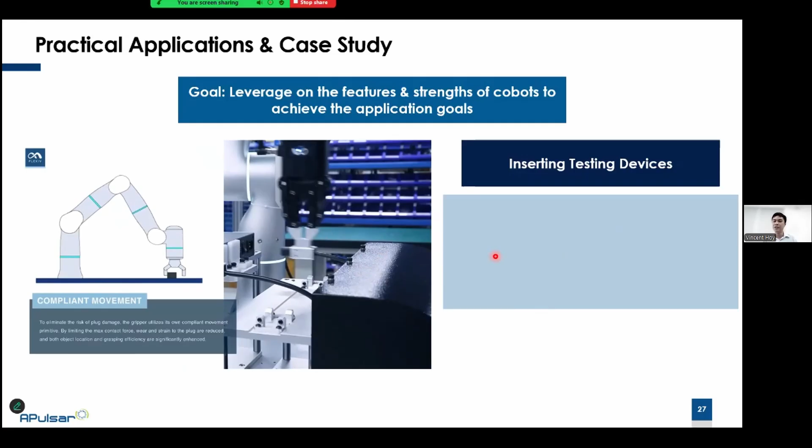This is inserting the testing device to test the electronics, right? So in this case, you see in the video, the robot can actually feel. You see, he can pick up and then he places it in, he cannot go in, but he can jiggle around and he can find the correct positioning, then only he can slot the testing things into the devices very nicely.

So you see, in this type of application, I've known of several cases where the customers requested to use robots to do these kinds of USB insertion. But a lot of these projects fail because when we use the traditional collaborative robots or even industrial robots, they don't have the ability to wiggle around to fit in these parts, just like humans do. So this is where the impedance cobot really shines. You see, especially here, it can wiggle around to find the correct hole to go into. So this is really its key advantage, right?

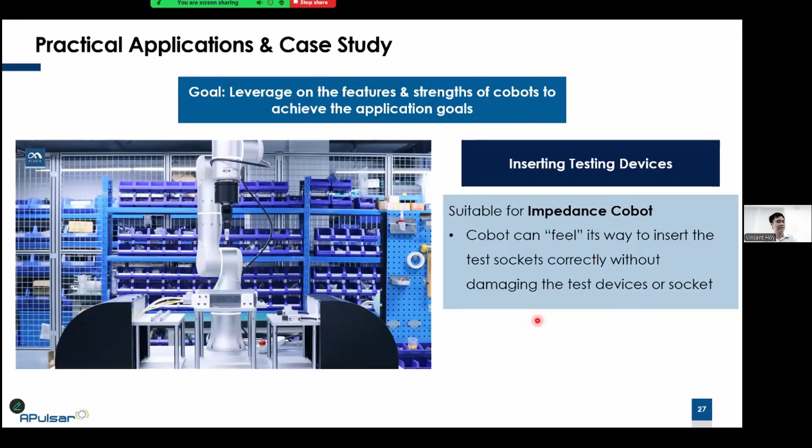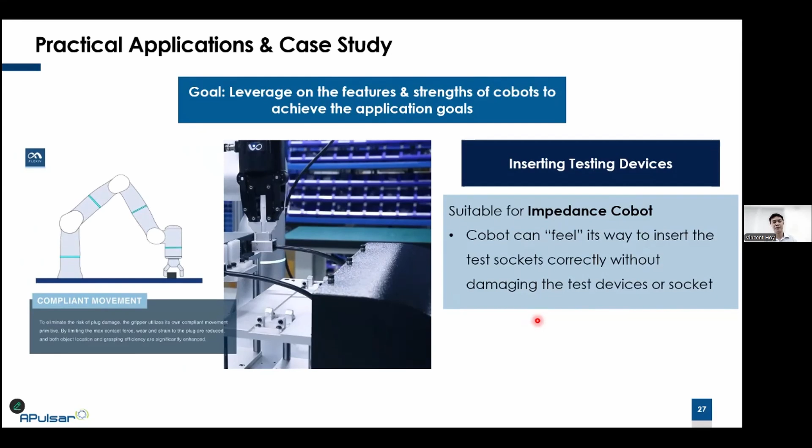So that's all of the applications and case studies that I would want to share for today. In fact, that is the end of the presentation, and I hope that all this sharing and case studies will be very useful. It gives you some ideas of what the challenges are and how we can go through the selection of the products to match what is required in your manufacturing line, right?